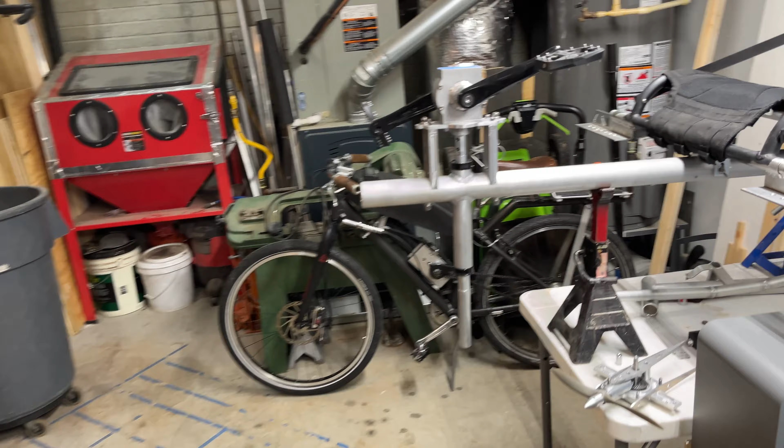We got a project to work on today. We're working on the hydrofoil. I've made some progress on it. As you can see, it looks different from the other video I did just about a year ago, but we're slowly chipping away at it.

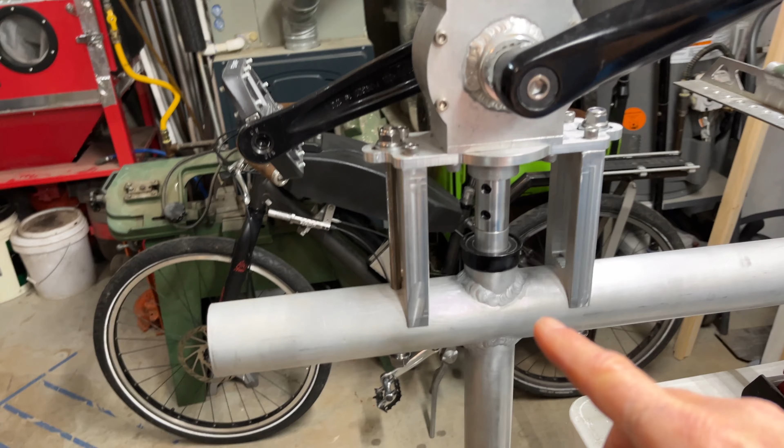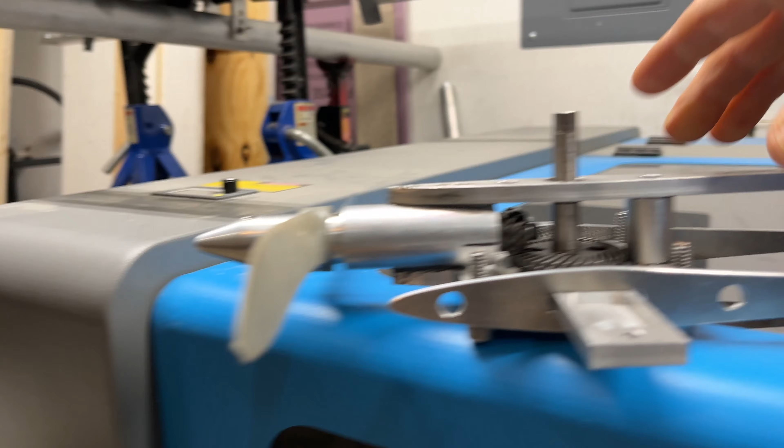What we need to make today is a little collar that goes right here. This is going to be my steer. So the front hydrofoil is going to be mounted here, and there's a drive shaft that goes down through the middle like this. See that piece turning? The rod that goes down here, and it's going to go to this bottom drive here that I made. So it's going to go down here, and then that's going to turn. Don't drop it. Turn the prop like that.

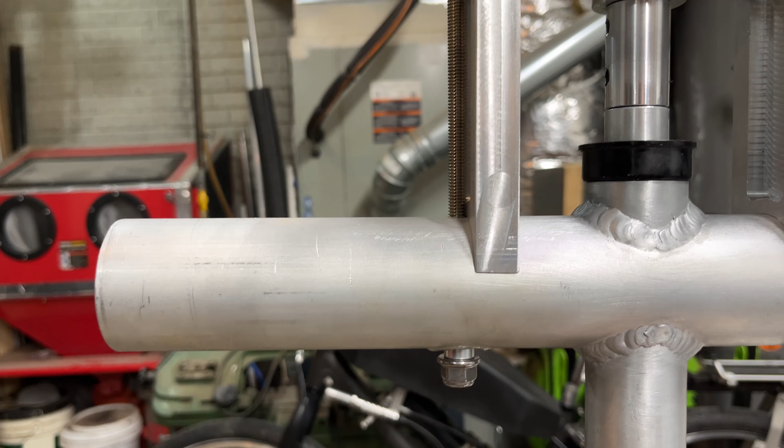What we need to make is the collar to keep this from dropping down like that, and something that we could mount to, like an arm or something, so we can actually steer it.

Let me show you what I got drawn. This is what we need to make. I don't know if you could really see it from the drawing here, but it's going to be a clamp.

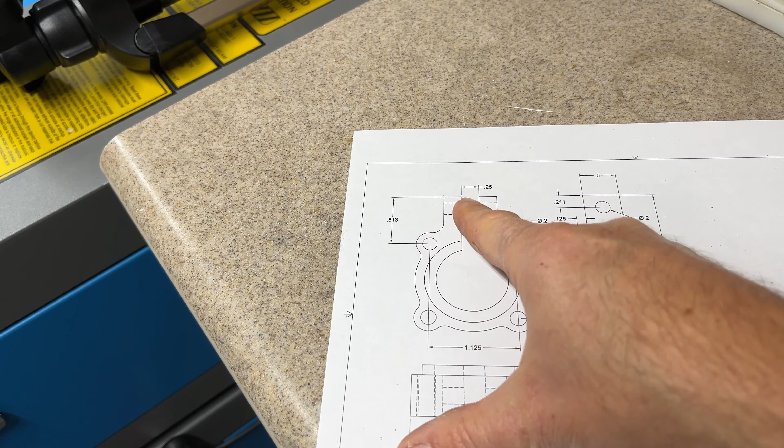This diameter right here, that's where the steer tube is going to go. There's a slot cut in it and two ears that come out that are going to clamp it, but it has 4 holes in it to mount a plate that's going to go on top, and then it's going to have ears that come out, and that's going to be able to steer it.

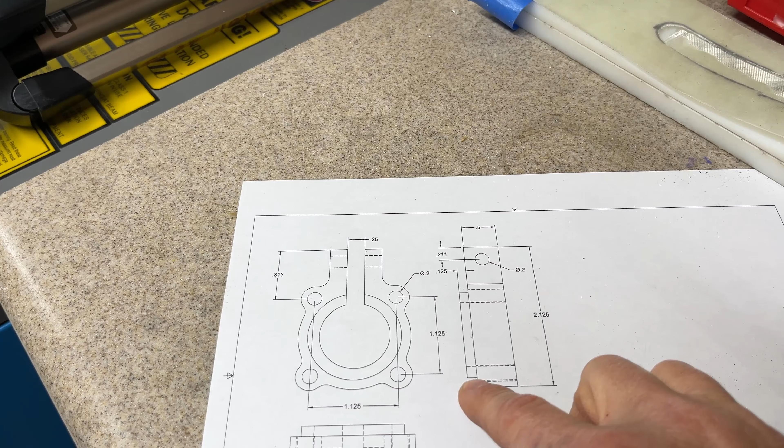And then you can see it's 1/2 inch thick, but then it's got this little bump out that's an 1/8 inch. So the overall is 5/8.

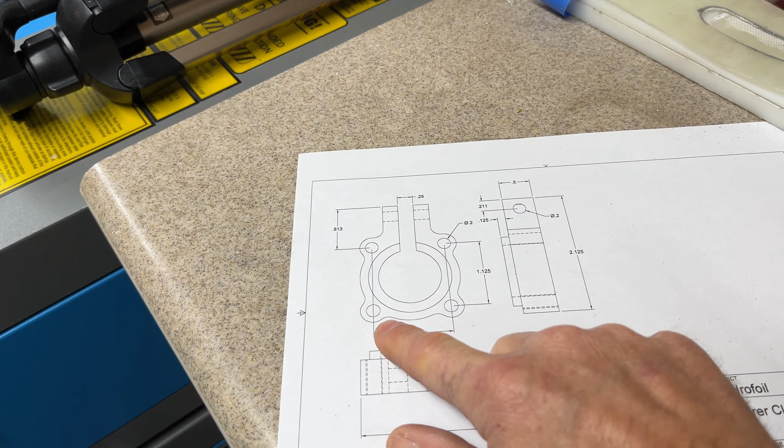So let's go ahead and make this. What I need to do is make some blanks, and then I'm going to CNC the profile and the hole right here. But to hold it, I think I need to make a fixture that's going to have these 4 holes in it that I can bolt up through the bottom. Drill the 4 holes in the material, bolt it down, and then cut the profile. I think that's what I'm going to do.

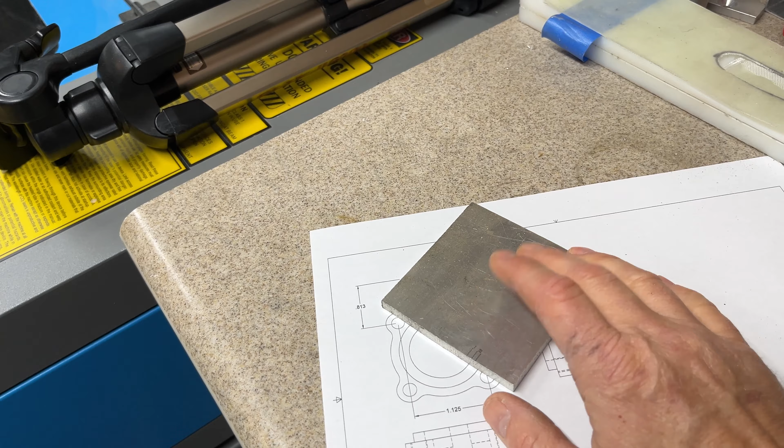But first, I got material here, 1/4 inch plate. This will be my fixture. And then I got this, 5/8, that'll be my part. So let's go ahead and start with the fixture.

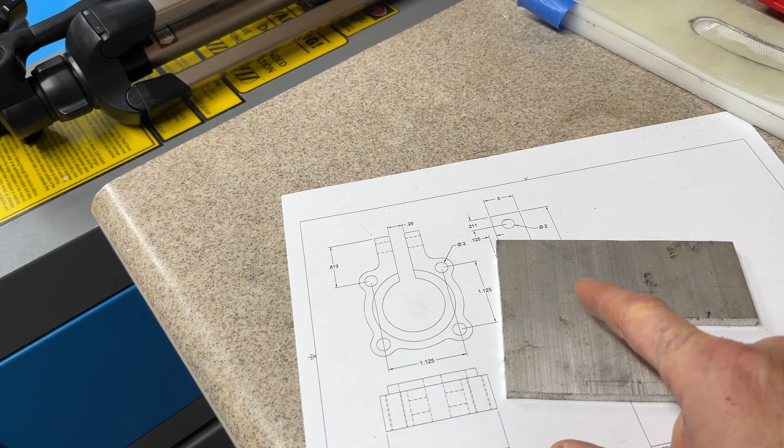Let me cut this out, make this square. We'll do the 4 holes, and then in the middle I'm going to do another hole. That'll be my locator, be my zero. When I check this in, I can zero that, and that'll locate my part there. So let's do that.

Got my piece all cut. Let's go over to the mill and square it up.

Squaring up this piece of aluminum is really simple. I find the side that is the squarest from the saw cut, and I put that on the bottom, and then cut the side first. Flip it over, cut the other side, and then that allows me to put it in the vise nice and square, and then I cut the ends doing a side cut, just like that. So kind of 1, 2, 3, 4, and you're done.

All right, I got my part all squared up. I didn't cut this to any dimension. I just squared up the thing, so it's kind of random, but I don't think that matters.

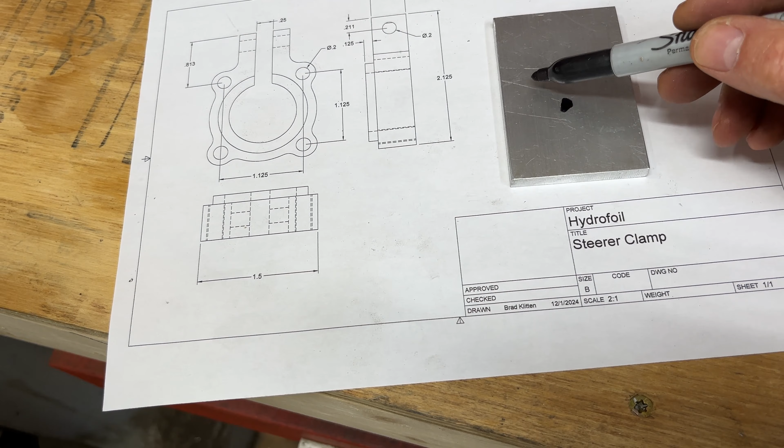Okay, now what we need to do is put these 4 holes in it, and the little center hole, that'll be my locator. This piece is longer this way, so this isn't really that centered. So I think what we'll do is come down, further from this end, and put the 4 holes. That's not even a whole, like here, something like that.

So let's put it back in the mill and drill those holes. All right, I got the piece centered this way and centered here, and then I came over 5/8 of an inch from the center. Okay, now what I'm going to do is use my center drill here, and I'm going to put a

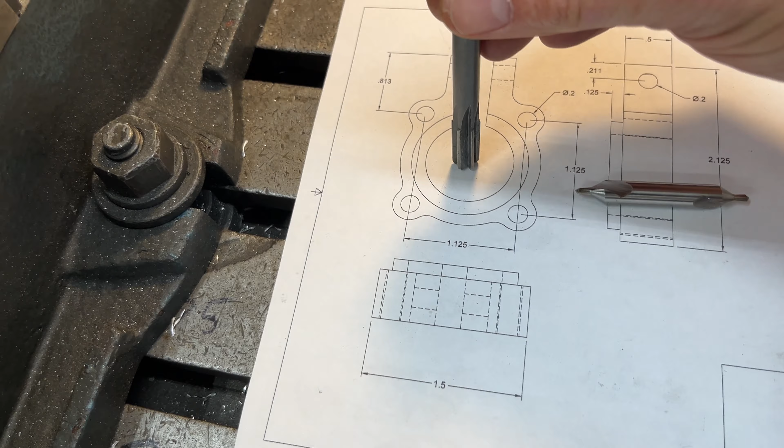little dimple there to locate my locator hole, and then do the 4, and then I'll use the number 7, drill them out, and then 1/4-20. Actually, no, I don't have to do. I have to go 1/4 inch because that needs to go through. And then I'll ream the center hole with a 3/8 just to make it a nice, clean hole there. So let's do that.

So when you're drilling holes like this, it's important to use a center drill. That locates all your holes where you want them, because when you use a drill bit, the drill bit can tend to wander and won't be as accurate. So that's what I did here. I'm just drilling the holes out with a 1/4 inch drill bit, and then I'll swap it over to one that's just a little bit smaller than 3/8, and ream it out, and that gives me a nice clean hole to locate.

And then I finish it up by cleaning the holes. All right, I got this piece done. Looks good. Now what I can do is put this in the vise. I can locate that hole and then offset it, because I think my datum's up here on the CAD. I gotta double check that.

But anyway, this is done. And then I need to cut this piece. However, I did measure this. This is 1/2 inch. That's not gonna work. So I need to use this. Let me cut a chunk out of here. And then we need to square it up and drill and tap these 4 holes right there. Let's go ahead and do that.

All right, I got this piece cut. All I got to do is square it up, and then we'll drill the holes in it. Let's do that right now.

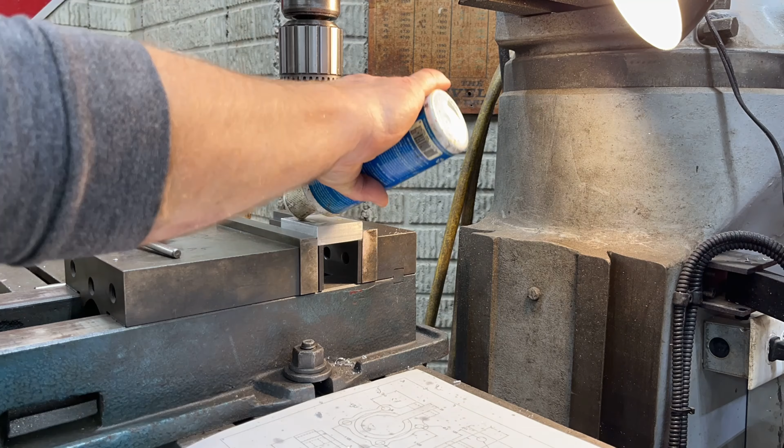So I'm doing this piece just like I did the fixture plate. I'm locating all my holes with my center drill, and I'm coming back with a number 7. It's 200 thousandths for the 1/4 that I need to tap it. So I've drilled all those holes, and then I'm starting each hole with the mill and finishing each threaded hole by hand. That just makes it easy to do. The mill makes it nice and square. So that's why I'm using that.

All right, here's my piece. 4 holes drilled and threaded, and that's going to go on there. I even got my fastener screwing from the bottom. And now all we got to do is cut out the center, the profile, and that slot.

Now it's time for the CNC. Let's get that going.

All right, I have my fixture plate in the vise. I got my stop right there, because I got to take this out, bolt this down, and then put it back in the exact same spot. So that's why that stops there. I indicated this hole that we put there, so that's going to be my 0,0, and I have it right there. 0,0,0,0.

Now what we need to do is take this part out of the block, put the part back in, and set my Z, and then load the program. Got my material loaded up there. It's all mounted securely. Got my tool in.

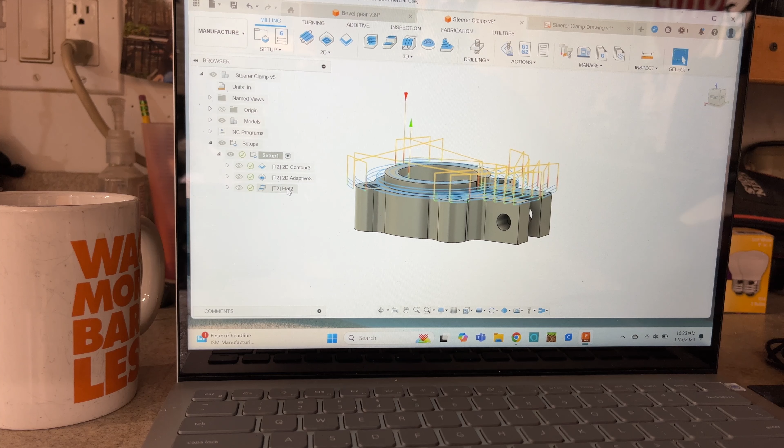The first one's going to be the contour, which will do the outside profile of it, and then it's going to come down and get this hole right there in this slot right there. It's going to clean that out, and then it's going to come down. I couldn't figure out a better way to do this, but it's going to come down and cut this top portion right there and leave this raised portion there. So anyway, that's what we're hoping to do.

So let's load that in the machine and see if it actually does it.

All right, I got everything zeroed out there, I got the program loaded. Let's go to graph, see what it looks like. All right, looks pretty good. There's all the tool paths, it's in the right orientation. There's that, the little center part's going to take forever. There's that view. All right, that looks good.

All right, let's go ahead and start it. Escape out of here. Put on the tool paths again. This is the biggest program I've ever run on this thing so far. And it's starting to move. Let me press cycle start. Here we go.

Here it is machining the outside profile, and every lap it does, it's dropping down depth of cut. I think 50 thousandths is what I did on the program. I am hitting it with a little bit of oil and blowing off the chips about every lap it does. I need to get a mister to do both, but I haven't done that yet.

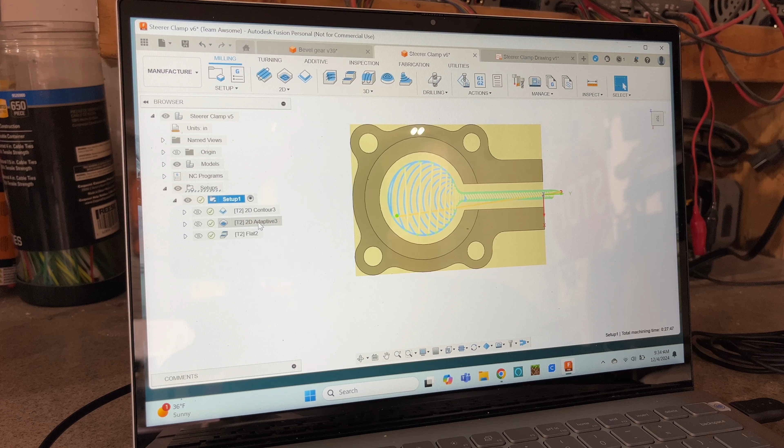All right, so back at the computer. There's the part right there, and let me show you what's going on. I did an adaptive, whatever that is. What that does, instead of just kind of going around and around, it does this weird kind of chips away at it. You can see the tool paths, like it looks like it does a circle, but it does it a little bit at a time. And so it leaves you with a part that's kind of undersized. I don't know if I went in with my settings here and left something out. Like I said, I'm not really all that savvy with this yet.

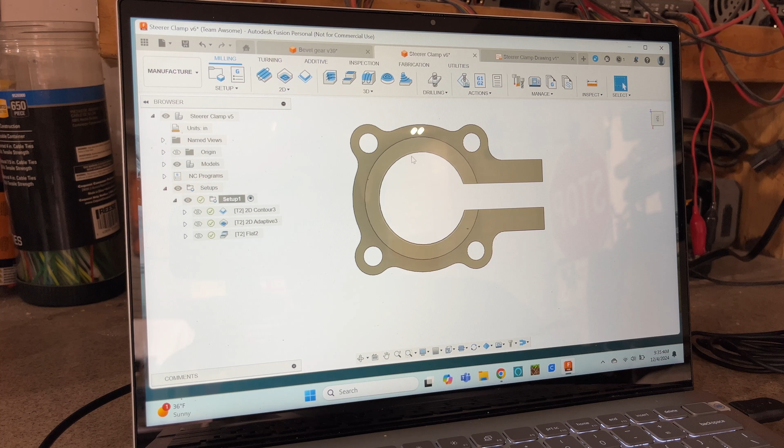So I think what I need to do is either choose a different operation, or I can do a circular pocket here, and do that on the software on the CNC. I could just zero this and say cut me a hole right there. The program gets a little weird in Fusion because of this opening right here, and when I was trying to program this, it just got a little funny. It didn't like this opening. So I think I'll just go over to the CNC and do a circular pocket.

Put the part back in the vise. I just set my Z right there, that's why that's all the way down. But what I'm doing over here is a circular pocket. What's nice about this program is it's really easy to do.

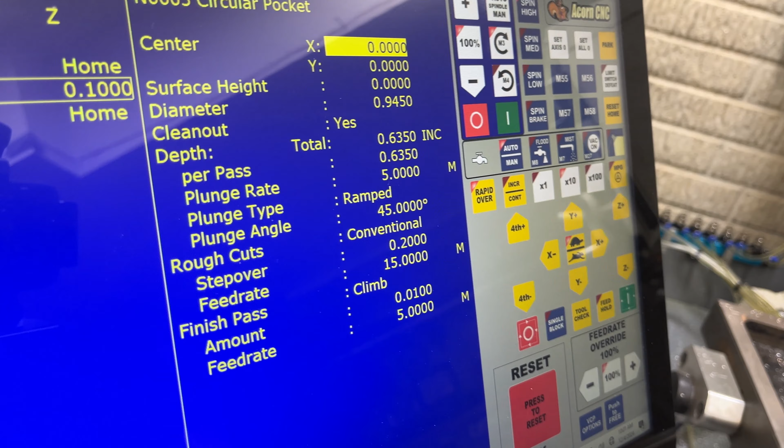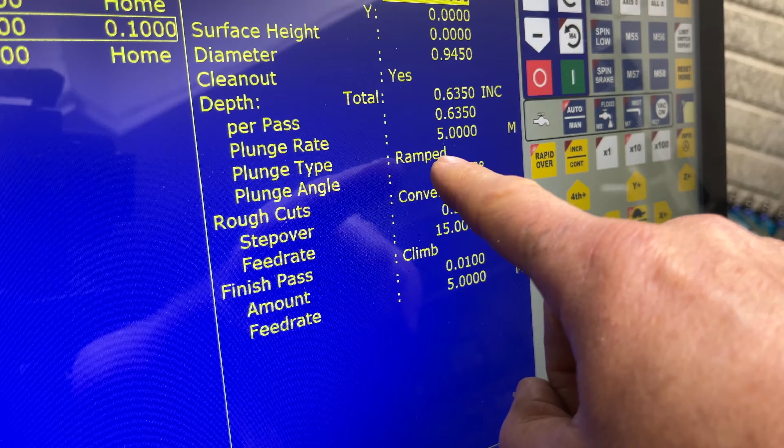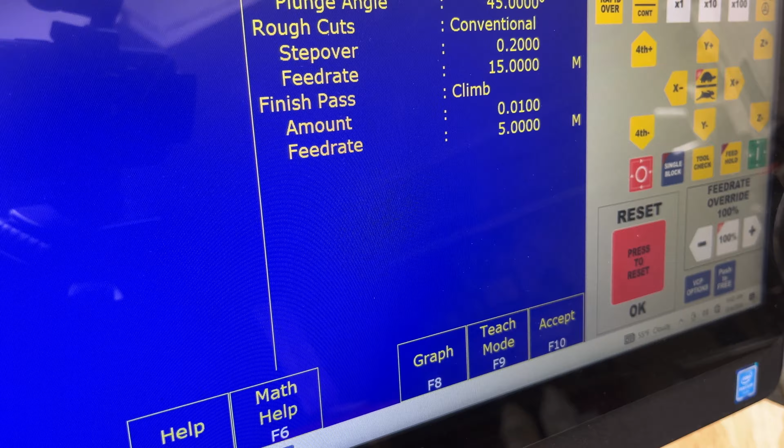Basically you just set your diameter right here. I got 0.945, per pass on my depth. I'm going all the way down. Plunge rate's 5. Step over is 0.2. Feed rate's 15, it's kind of slow. Finish pass, I got 10 thousandths, and it's at 5 on my finish rate, so it should be really nice.

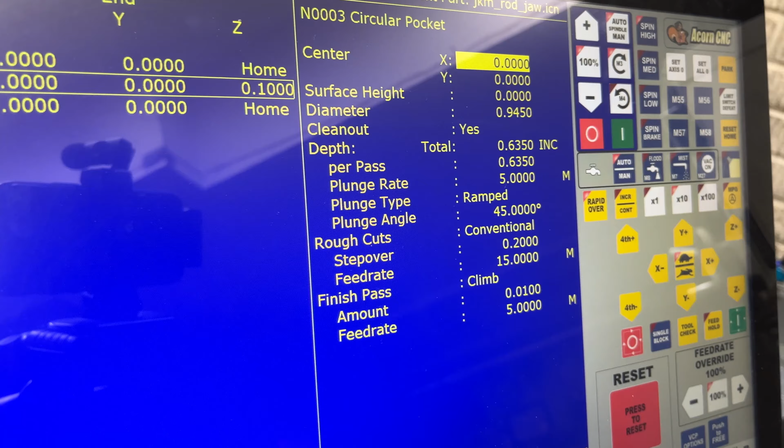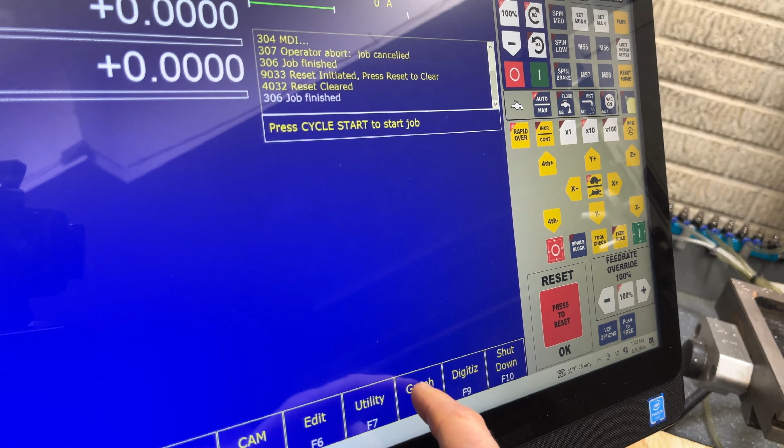I'm going all the way down on this because it's already mostly gone. I'm just kind of making it round and cleaning it up a little bit. Go ahead, accept, and we'll post it like that. Generate successfully. Go to graph here. Boom, there's my toolpath. So alright, we'll go to that, and we'll go to it.

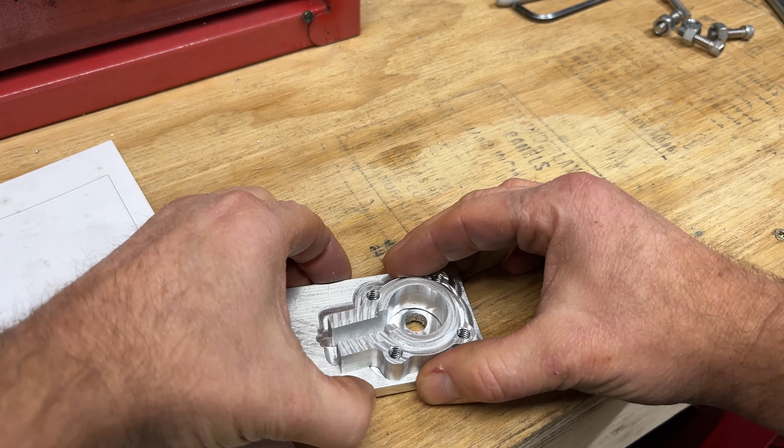We'll start it. Up it goes. Alright, that didn't take long at all. You can see the inside right there. That's just a lot better toolpath, in my opinion.

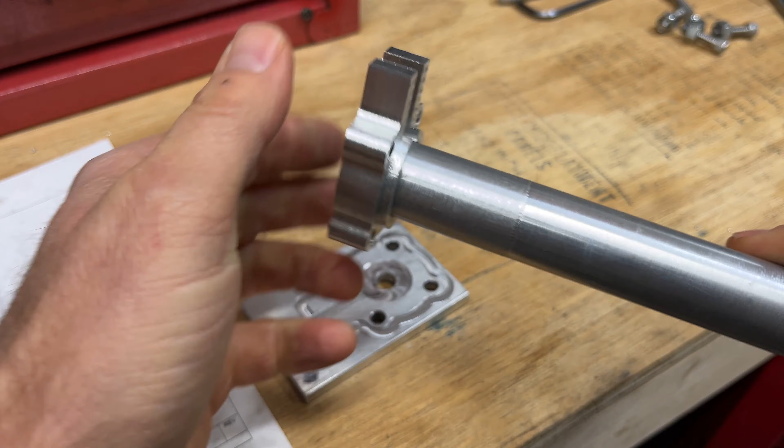Let's see if it fits. I'm going to go on like this. Let's see here. Ooh, that is perfect. Look at that, alright. Now what we got to do is drill a hole right here, then we're done. Let's go ahead and do that.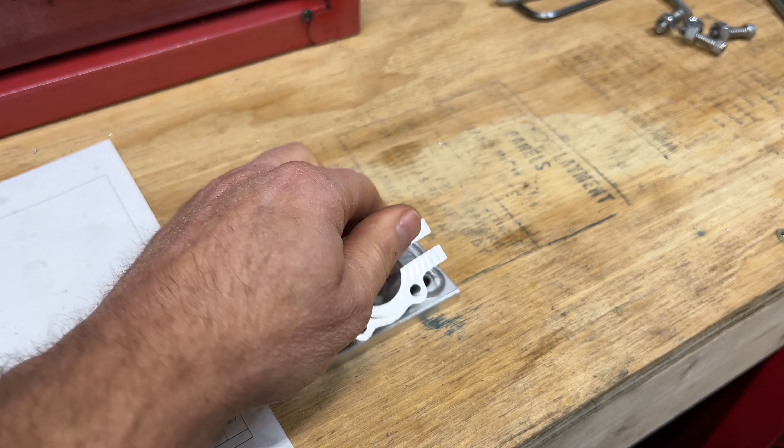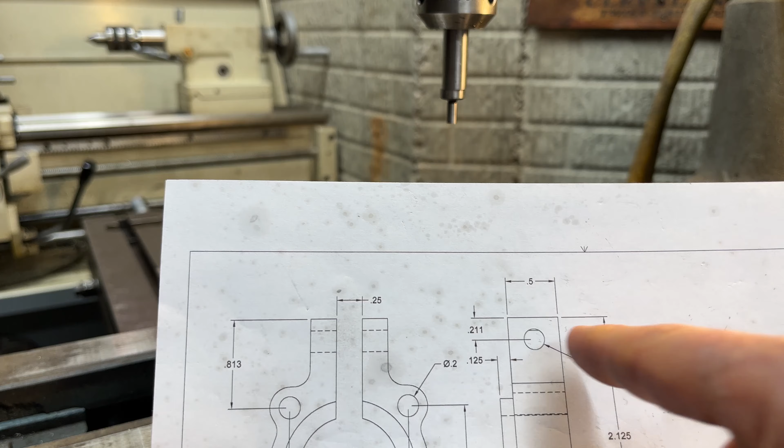Looking at the drawing, it looks like my hole is 211 thousandths down from this edge. It's not noted on this drawing because I probably should have done it. But this hole is centered right here, so it's a quarter inch from either side. So what I need to do is put this in the vise, locate this edge, these two, and then we'll get the center, and then come down 211 thou and drill a hole. This one's a through hole.

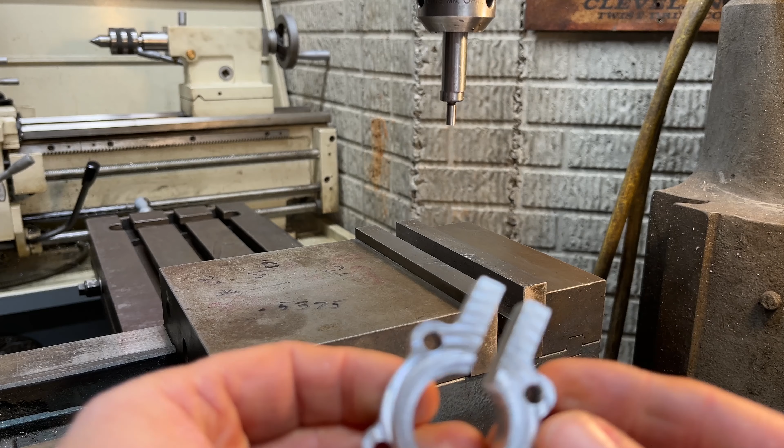I'm thinking I could drill through this way a quarter inch and then tap this side. There's only a quarter inch of aluminum there. I don't know if there's enough meat to really crank down on this. So I might go all the way through and then do a bolt and a nut. But you know what, actually let me try it, and if it doesn't work, I can always just drill it out and do it that way. So let's drill this, drill this side and tap this side, and we'll see how well that works.

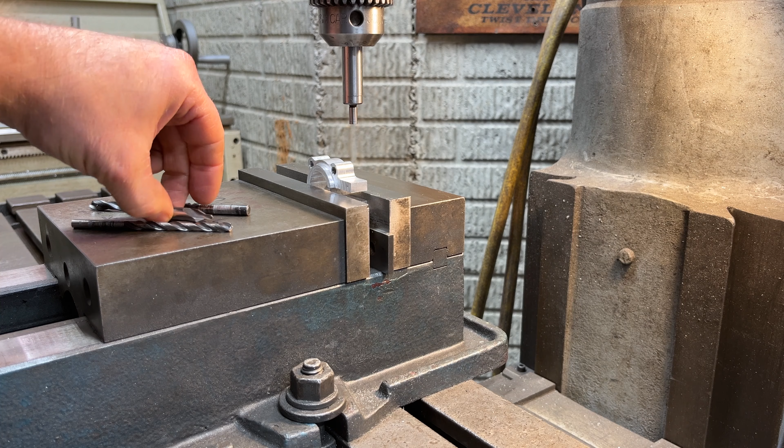So let's go ahead and get this located. Alright, here are the tools I'm going to use. I'm going to use a center drill to locate it, a number 7, and then a quarter inch. I'm also going to tap it, so I got a quarter-20 tap too. Alright, let's go ahead and get this going.

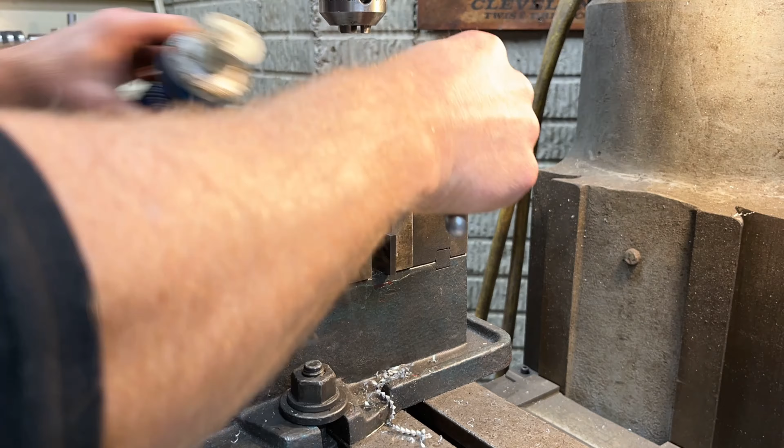So I start with my center drill to locate where I need the hole. I drill all the way through both sides with the number 7, then swap over to a quarter inch, but just drill the one side, and then I come back with my quarter-20 and tap the hole.

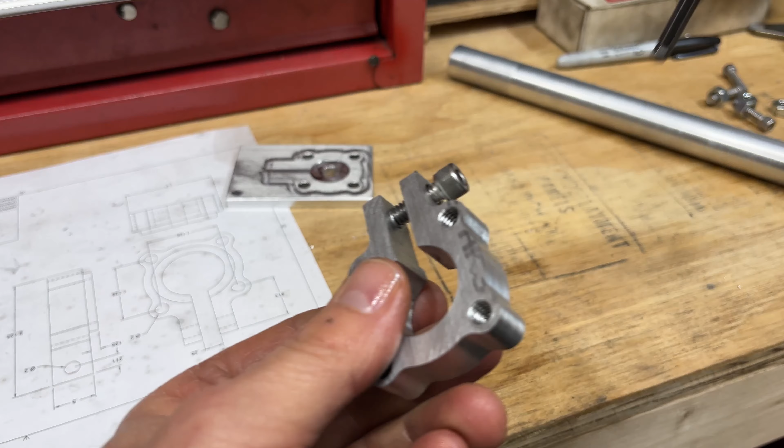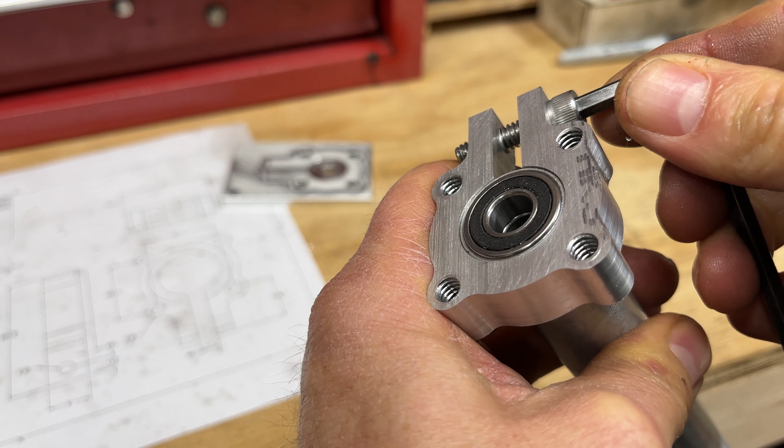Alright, got that all drilled out. That looks pretty good. I might actually go with just threading this one side here. Pretty good, bolt's just a little long. See how this snugs up. Oh yeah, oh yeah, that's not going anywhere. Sweet, let's go put this on the hydrofoil.

See how it looks. Part's on there looking good. That was a fun little part to make. There's a lot more parts to make on this hydrofoil.